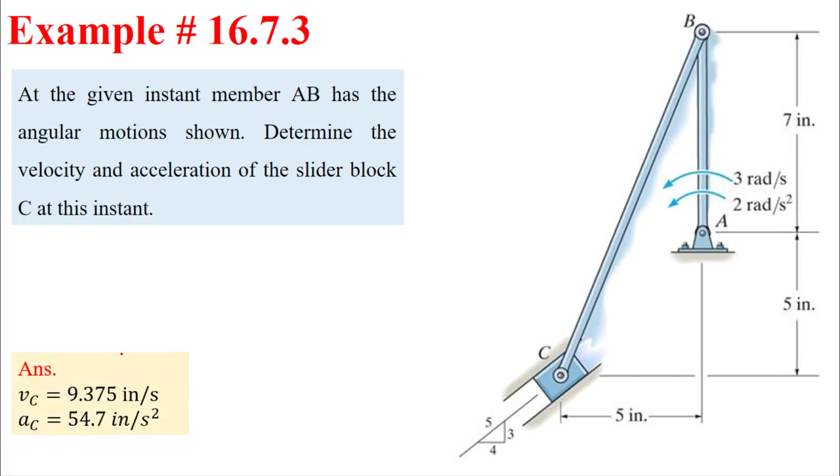كرمايندر للإشي اللي عملناه في هذا الشابتر، شابتر 16، خليني أرجع فيكم بالسكشنز لورا. هذا الشابتر كان بيحكي، وطبعا احنا لما بدينا فيه كنا مخلصين الحكي عن شابتر 12 اللي كان بيحكي عن البارتيكل. فبدينا نحكي عن الكيناماتكس للريجيد بودي.

وبهذا الشابتر بدينا بمجموعة sections 16.1 up to 16.3، وعرفنا فيها أنواع الحركة للريجيد بودي. حكينا عن translation، وحكينا عن الروتيشن، وشفنا بالترانزليشن الكيناماتكس سواء displacement أو الفيلوسيتي أو الاكسلريشن، ونفس الشي شفنا الكيناماتكس للروتيشن about fixed axis velocity والاكسلريشن.

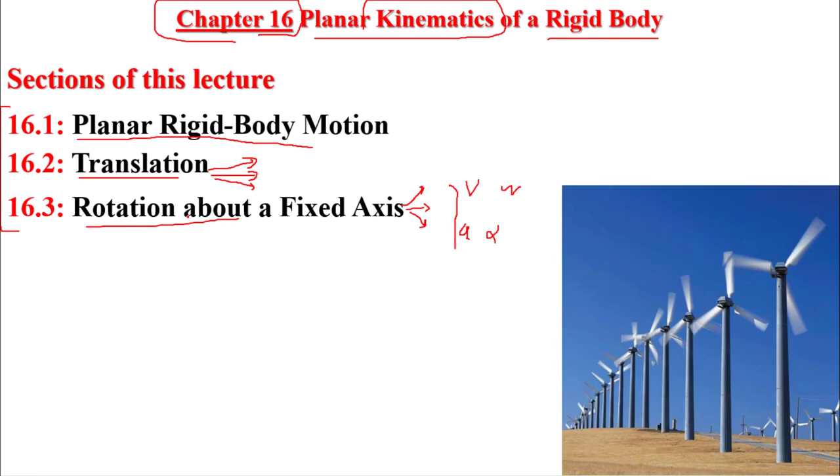وبهذا السكشن تعرفنا على العلاقة بين الفيلوسيتي والأوميجا، وبين الاكسلريشن والألفا. هذه الأشياء كلها عملناها في هذا الشابتر، وشفنا الأوبجكتيف طبعا له.

وبعدها رحنا على section 16.4، بدينا نحكي عن طرق حساب الفيلوسيتي للجنرال بلين موشن. لأننا في section 16.2 و16.3 حكينا عن أول نوعين حركة translation و rotation، وبعدها انتقلنا للجنرال بلين موشن وأوجدنا الفيلوسيتي باستعمال الابسوليوت موشن اناليسيس.

حكينا من البداية كيف نوجد علاقة بين الثيتا والديسبليسمنت، وبعدها نوجد الفيلوسيتي. هذا كان في section 16.4، طريقة حساب الفيلوسيتي للجنرال بلين موشن، وكان فيه عدة طرق. هذه أول طريقة: الابسوليوت موشن اناليسيس.

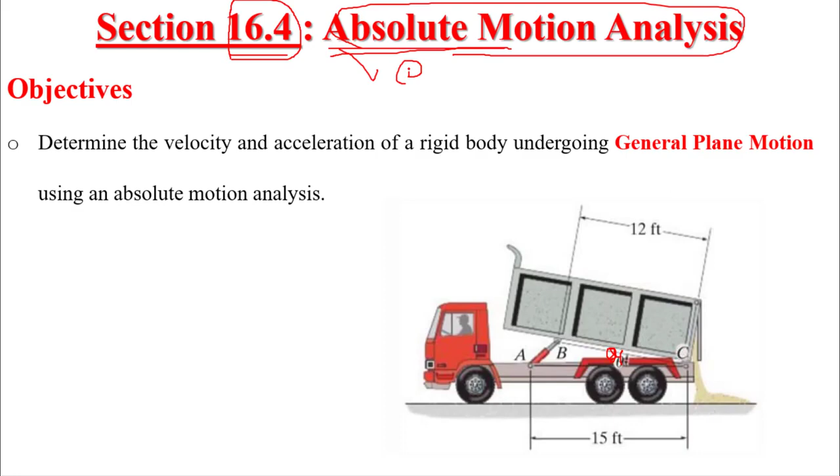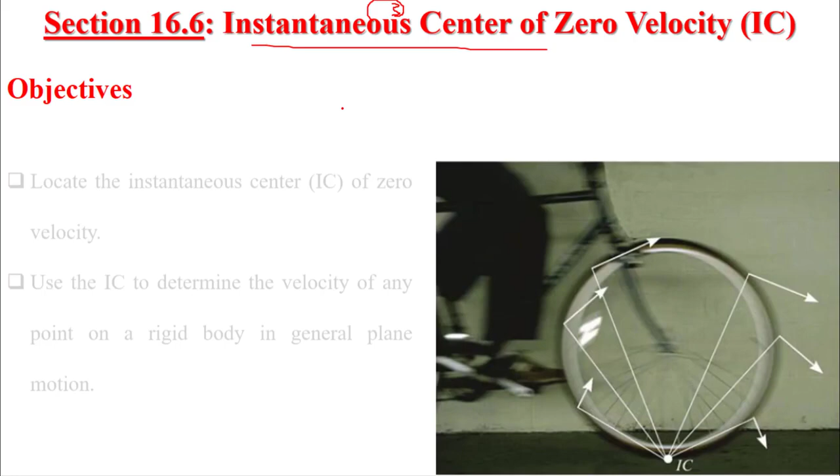الطريقة الثانية كانت الريلاتيف موشن اناليسيس لحساب الفيلوسيتي، relative motion analysis طبعا للجنرال بلين موشن again. وعندنا الطريقة الثالثة لحساب الجنرال بلين موشن velocity، وهي instantaneous center of zero velocity، IC method. وبهذه الثلاث sections أنهينا الحكي عن حساب الفيلوسيتي، وبعدين انتقلنا للسكشن اللي بعده 16.7

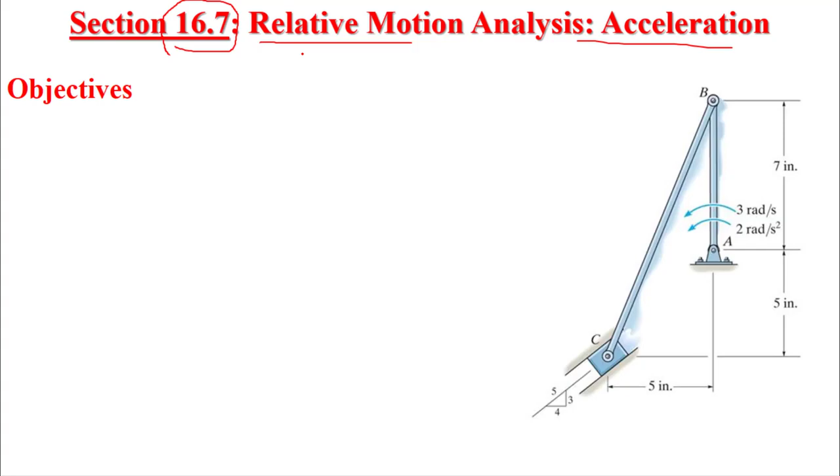وحكينا حنستعمل هذا التكنيك لحساب الاكسلريشن، relative motion analysis، نفس طريقة حساب الفيلوسيتي في سكشن 16.5. وكتبنا معادلاتها، كنا بنعرف مثلا إذا بنحكي عن اللينك BC لأنه هو اللي بيحصل عليه جنرال بلين موشن. إذا كنا بنحكي عن سرعة BC، relative velocity equation: VB plus omega cross product RB with respect to C أو RC with respect to B.

سمينا هذا الترم اللي هو relative velocity VC with respect to B. وجينا اشتقينا هذه المعادلة في هذا السكشن، وطلعت معنا معادلة الاكسلريشن اللي هي AC بتساوي AB، absolute acceleration سميناها، وحكينا this is equal or plus alpha cross product relative position vector RC with respect to B، minus omega squared RC with respect to B.

وسمينا هذه، both of them، اسمهم AB with respect، AC with respect to B. This one called tangential, AC with respect to B tangential، وهذا AC with respect to B normal. So هذه كانت في section 16.7.

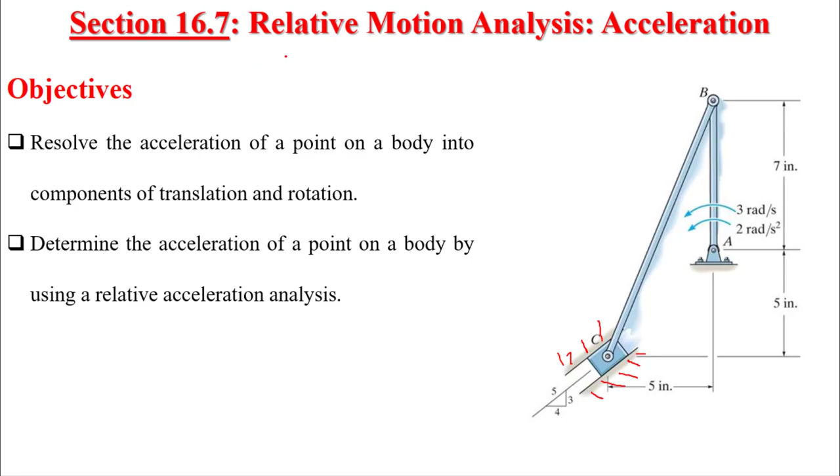وكمان بدي تلاحظوا إنه كان دائما إذا كان عندي سلايدر، كان دائما connected with the ground. So from one side connected with one of the link and from the other side connected with the ground. أغلب الأسئلة لو ترجعوا 16.7 هتلاقوها بهذه الطريقة.

طيب so section 16.8 هسه بنحكي عن relative motion analysis، نفس العنوان، relative motion analysis للأكسلريشن، ولكن هون حنستعمل الروتيتنج axis. في كل البروبلم السابقة كان الأكسس يحصل له translation only without rotation. هون حيحصل له الأكسس two things: translating and rotating at the same time.

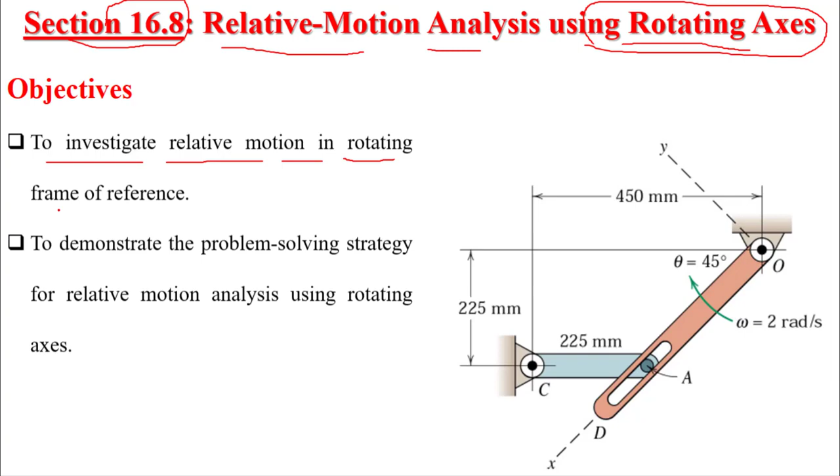So the objective is to investigate the relative motion in rotating frame of reference. هنشوف الموشن لما يكون الريفرنس بيحصل له rotating، لما يكون الفريم of reference بيحصل له rotating، to demonstrate the problem solving strategy for relative motion analysis using rotating axis.

طيب so إذا بنيجي بنطلع very quickly على هذا النوع من الأسئلة، وباجي بسألكم سؤال من هذه النوعية من الأسئلة: مين فيهم بيطبق على 16.7 ومين فيهم بيطبق على 16.8، عشان تعرفوا تجاوبوا.

خلينا أفرجيكم هذه. طبعا هذا السؤال زي هيك يطبق على 16.8. ليش مباشرة حكمت؟ لأنه السلايدر، زي ما انتم شايفين، which is fixed and rotate with link AC. So this slider rigidly connected on AC and it freely rotate with the link OD as you can see.

So this slider has two motions actually. The first motion is a translation with the link AC. Okay, so here is the track.

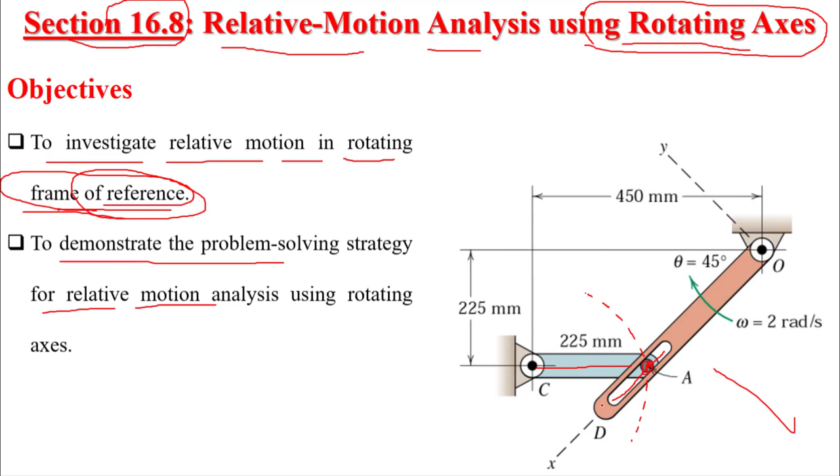Okay, and at the same time it slides on link OA. So it has two motions. So if we take a look to these examples,

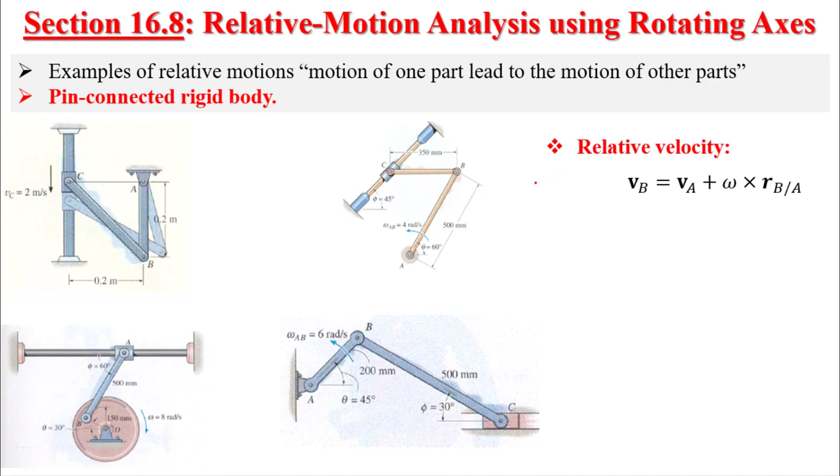So if the slider does only one type of motion, then we can say that we can solve it by using the previous knowledge from section 16.5 and from section 16.7. These questions are considered from section 16.7, only translating.

Okay, now if we have a problem like this, I'll ask you which of these examples is applicable for 16.7 and which of them is applicable to section 16.8. Take like one minute, pause the video and try to think and determine which of these examples is applicable for section 16.7.

If your answer was that all of them are applicable for section 16.8, then your answer is correct. So all of these examples are only applicable for section 16.8. But why can't you benefit from section 16.7 only? You must use section 16.8.

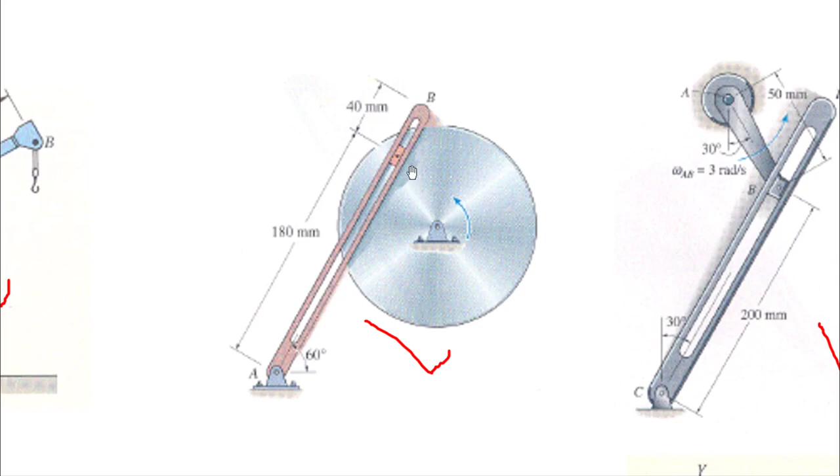Why? Because, for example, if I start with this scenario, here is the slider, and the slider here is rigidly connected to the disk, so it rotates. The first type of motion is rotation with the disk, and it's freely sliding inside this channel on link AB, which is doing rotation. So it is sliding on link AB, freely sliding, translating from one point to another, and freely rotating, rigidly connected on the disk, so it rotates with the disk. Here the same.

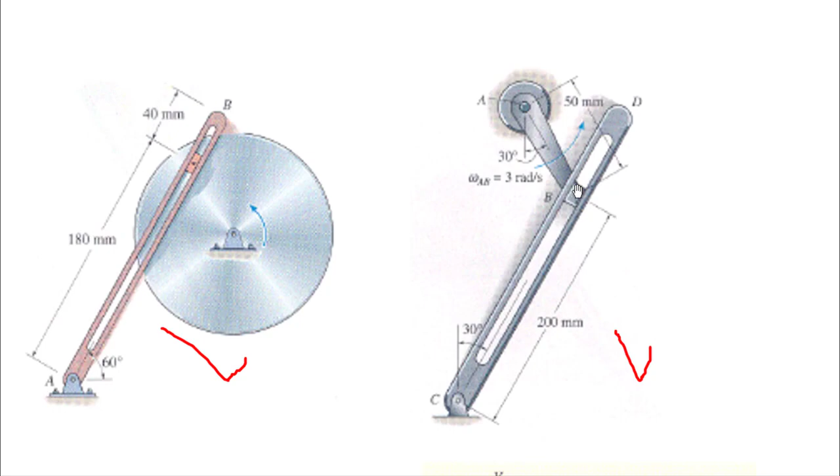So the slider is sliding with link CD and rotating with link AB. So for this one, for example, where is the link that is doing general plane motion? Where is it? This link AB. So here in the middle we have this slider.

So from this point onward, it will extend or contract. So this link AB can rotate, and at the same time it can extend. So here the slider will have two types of motion, rotation and at the same time translating.

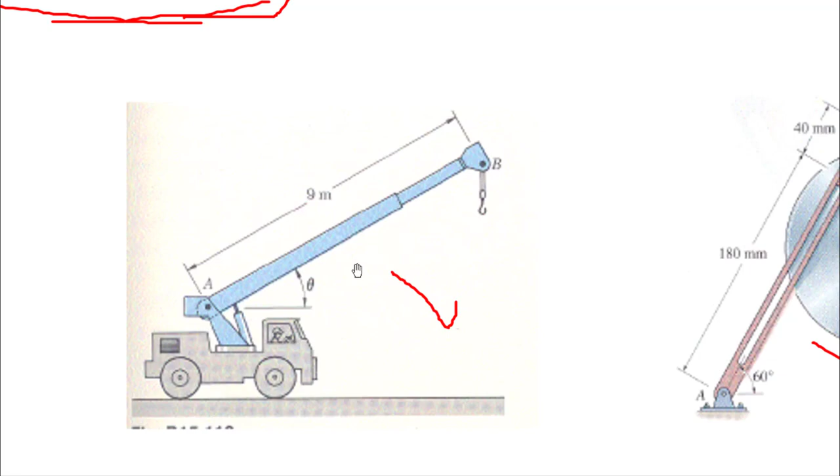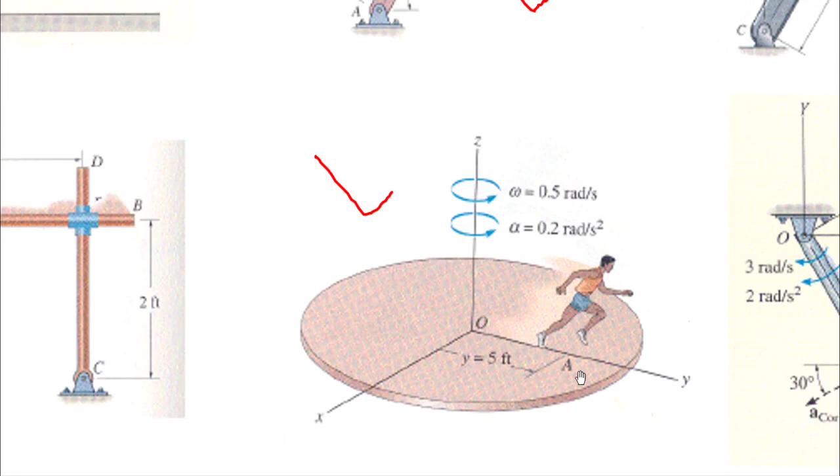So let's see another example. This runner, for example, here this disk is rotating. So this runner will rotate with this disk, and at the same time he is starting from the centroid and running toward the circumference. So he is translating, and at the same time he is rotating with this disk.

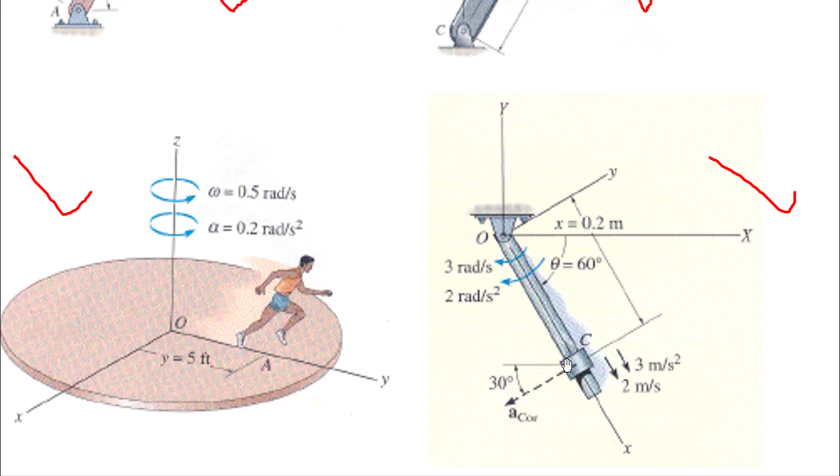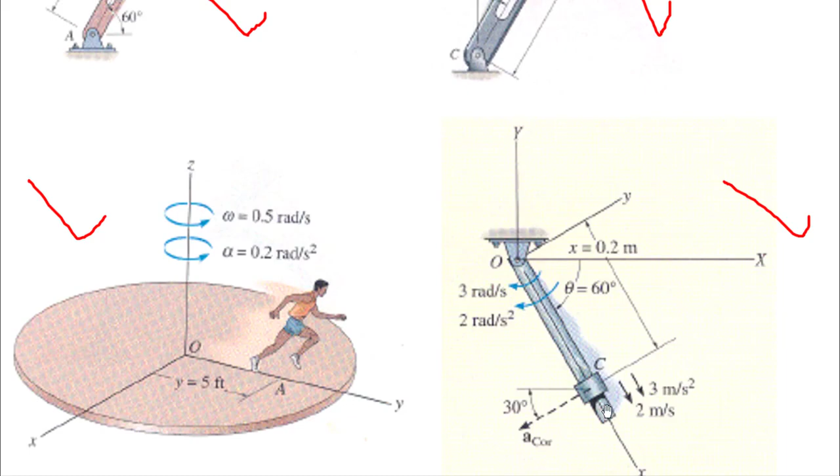This collar or ring has two types of motion: translating, sliding on this link, and rotating with this link, because this link is rotating also. So it is sliding forward or backward, and it is rotating at the same time. So two types of motion.

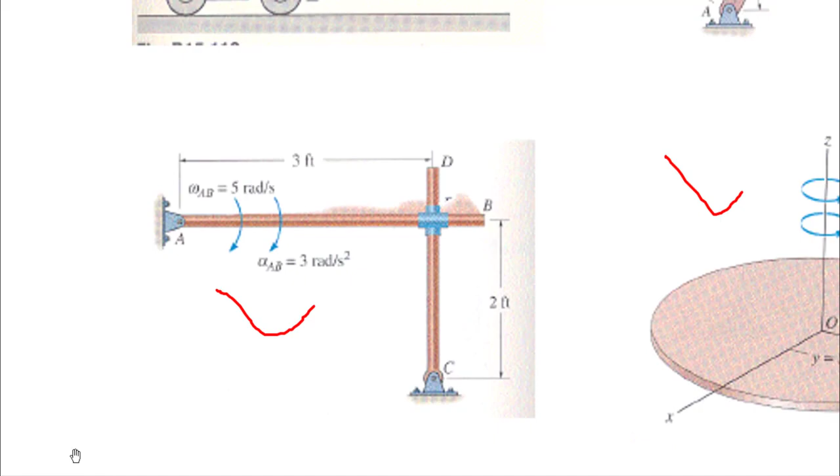This connection has two types of motion because it can slide as these two links rotate. So it rotates and slides at the same time.

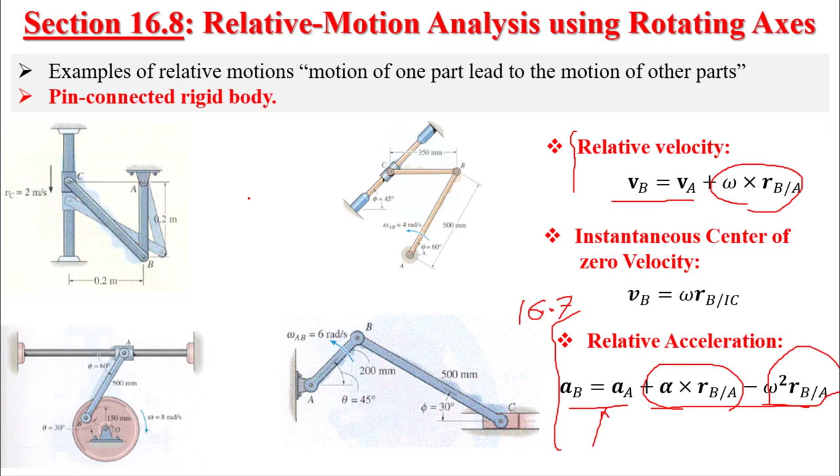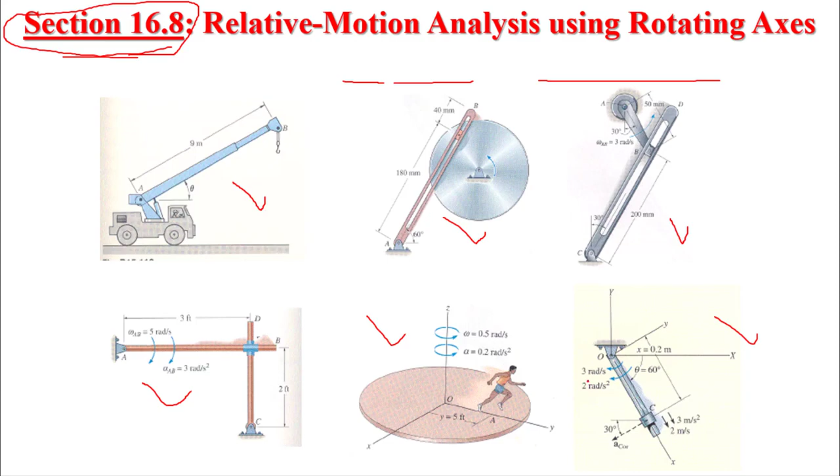So this example of relative motion with sliding connections has two independent motions, rotating and translating. In the previous examples, the slider would do only one type of motion, sliding only, because it's connected to the ground. In this type of example, it's not connected to the ground, it's between two links. In this scenario, it is not connected to the ground, it is sliding on a rotating link, so it slides and rotates on a rotating link. So two types of motion, two independent motions.

So take a look at this rigid body in blue color. Let us first try to notice the most important things written on this figure. So here we have a point, an observation point, we can call it, for one sitting on this point and observing this rigid body. So we'll take it as a reference. This reference, its name is X and Y uppercase.

Now, this rigid body, I can relate point A and point B with respect to this point, but you can see that this rigid body is translating from this point to there, and at the same time it rotates. So this rigid body translates and rotates. So you can notice that this frame, this coordinate system, is rotating. So it is not correct to say that point A has this coordinate system.

This coordinate system actually rotates with a certain angle. So here is the rotation, new location. So the axis is rotating. Is this going to affect the value of the relative velocity, for example, if we start with the velocity, or does it affect the position equation? We'll see, okay.

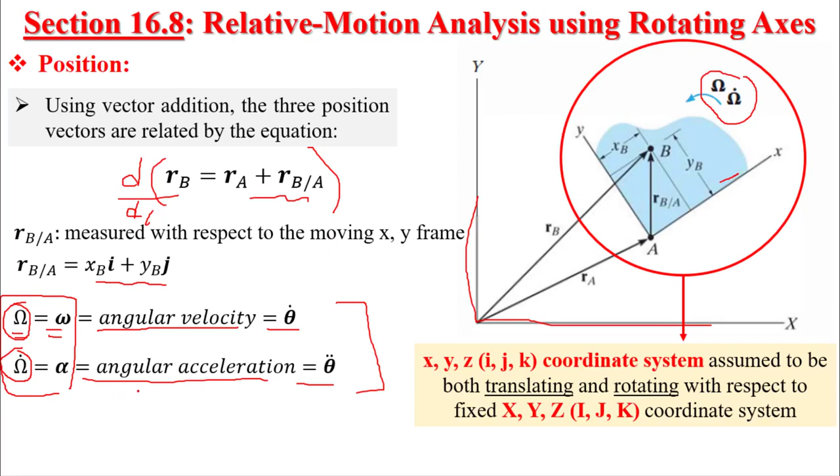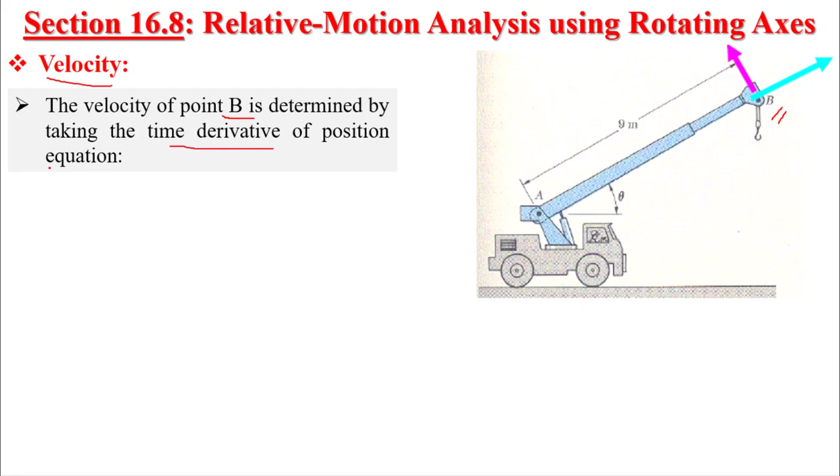So, how can we find velocity for a slider that is translating and rotating? The velocity of point B is determined by taking the time derivative of the position equation: RB equals RA plus RB with respect to A. So if I take the time derivative, the absolute position becomes absolute velocity - nothing's changed, it's the same.

dRA with respect to dt is equal to VA, absolute velocities, nothing changed. The only change will happen in this parameter, d with respect to dt. As you remember, RB with respect to A is equal to

XB, lowercase, multiplied by its direction, plus YB multiplied by J. So here we have two variables. Now we'll derive them with respect to time. So this relative position: rotate and translate. Translate x and y will change; they will be variable. Rotate axis I and j will also become variables.

So if I insert the derivation to this relative position vector, xbi plus ybj, the derivative will go to the first variable, then it will go to the other one, plus. So here we have two variables: first derivative multiplied by the second, plus first parameter multiplied by the derivative of the second one. Plus the same thing will happen for the other parameter: derivative of the first multiplied by second plus the first multiplied by the derivative of the second.

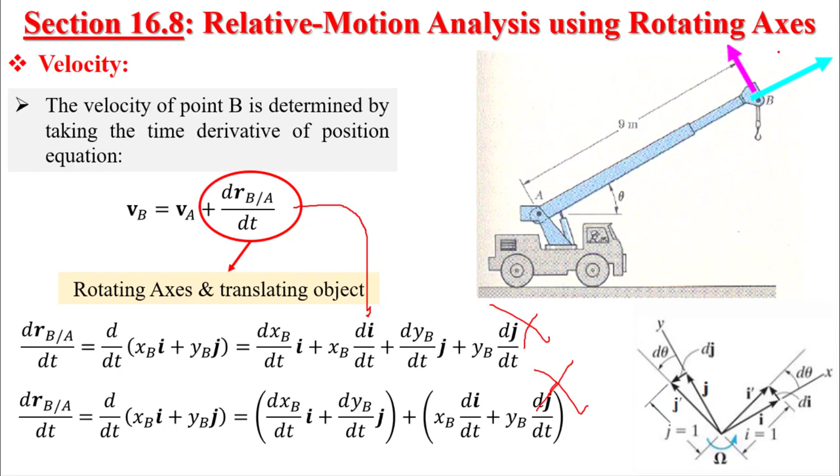equation to the velocity relative position equation. We reach up to this format. We write VB equal VA plus this term. Still we derive this term. We reach up to this one. So we gather these two terms together and these two terms together.

So these two terms represent the velocity of point B with respect to the x, y, z coordinate system. This is the relative velocity of B with respect to the x, y, z system. And this term represents the rotation d theta of the x, y, z axis. So this term can be written as VB with respect to A for the x, y, z coordinate system, and this term can be written as omega cross product xb in I direction plus yb in j direction.

So how do we transfer from here to there? From the knowledge of this picture, as I told you before, this is the arc, di, and this is theta. So I can substitute in here, or I can take it outside, and you know that omega and xb, both of them, so I can transform it to the cross product.

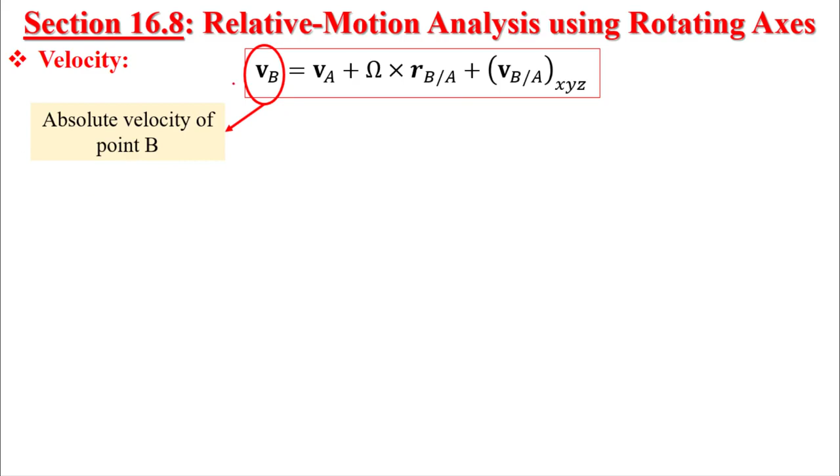So what we can understand from this equation, the first term is the absolute velocity of B. The two terms here is the absolute velocity of B on the XYZ frame. This is very similar to the original equation without the last term. This last term is the relative velocity of B with respect to A, so it is a relation between the secondary coordinate system and the original coordinate system.

And here is the explanation for each term. Now this is the velocity equation for a rigid body that does two types of motion, translating and rotating.

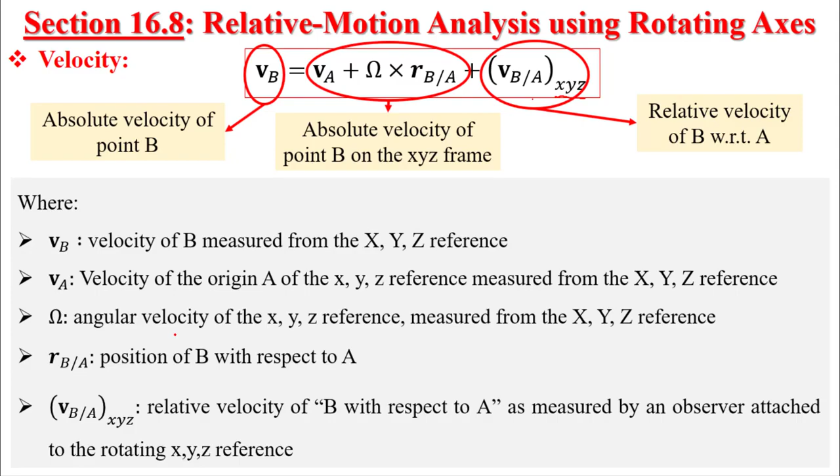Acceleration, what we'll do, we'll take the time derivative for this equation. So the time derivative for the first term can be written in this format. The second one, dV over dt. The third term, we have two variables, so the first derivative of the first cross product the second, plus first cross product the derivative of the second, plus the time derivative of the relative velocity.

Here the first three terms, this one and this one and this one, is straightforward, because instead of this one I can write AB directly. Acceleration, absolute acceleration of point A, of point B. Here, absolute acceleration of point A. This one, the omega with respect to dt is omega dot, or alpha. So it is direct.

This one, omega cross product dRB with respect to dt, will go through same steps as in the previous slide. So I can write the direct answer for this one, which is, remember, we named this term as dR with respect to dt for whom? For RB with respect to A. So I can write the final result, so instead of this term I'll remove it and write this one.

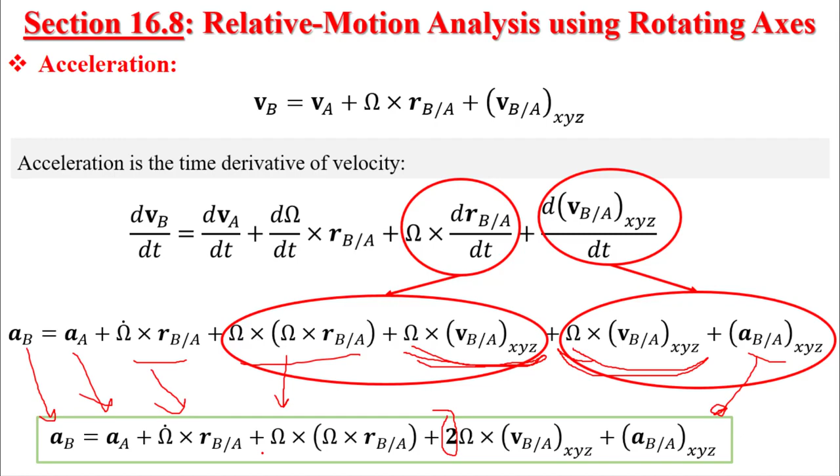Now, how can we compare this equation with the previous equation in section 16.7? Here it is. You can tell that this equation up to here represents 16.7, because this represents alpha cross product RB with respect to A. Here the cross product gives us, I showed to you earlier, this one, which is equal to minus omega squared RB with respect to A, and I explained before why it becomes minus. So instead of omega squared, I can write this symbol.

The only new terms are these two in the acceleration equation when we have a body that does both types of motion. This is the absolute acceleration of the origin. This is the tangential acceleration, alpha cross product r, and this is the normal acceleration, omega squared r, with a minus sign of course.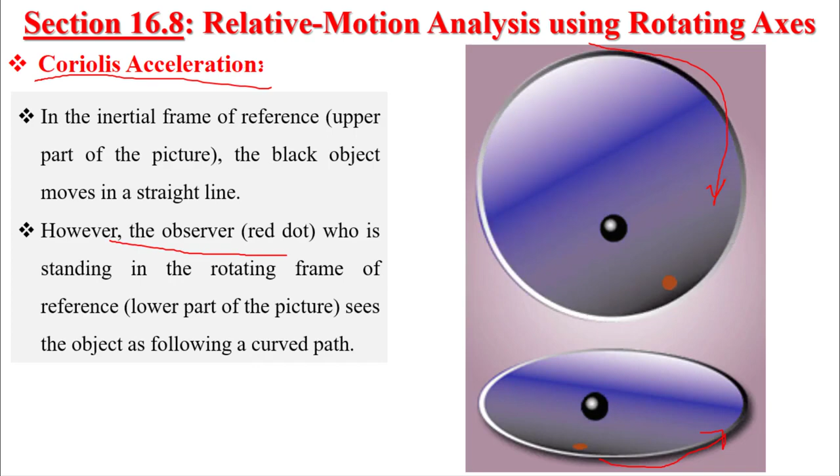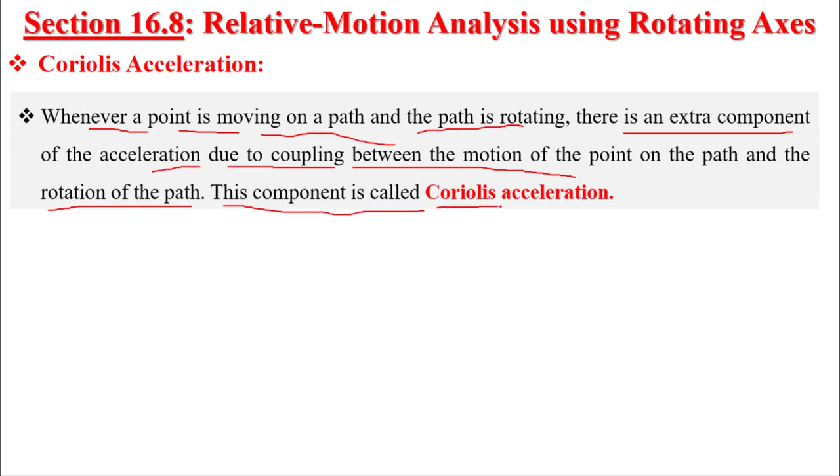That means the Coriolis acceleration is responsible for the two types of motion, translating and rotating. So Coriolis acceleration: whenever a point is moving on a path and the path is rotating, there is an extra component of acceleration due to the coupling between the motion of the point on the path and the rotation of the path. This component is called Coriolis acceleration.

It is the coupling between rotation and translating. It was discovered by the French engineer Coriolis, and it's named after him.

Important: this component of acceleration is very important in studying the effect of force and acceleration of Earth's rotation on rockets and long-range projectiles.

Because here we are facing two types of motion: the rocket translates, and at the same time the Earth rotates. So we have a coupling, and we need to consider the relative coupling between them—because the Earth is doing rotation and there is gravity acceleration affecting the rocket, so it will rotate with the Earth, and at the same time it will translate far away from the Earth.

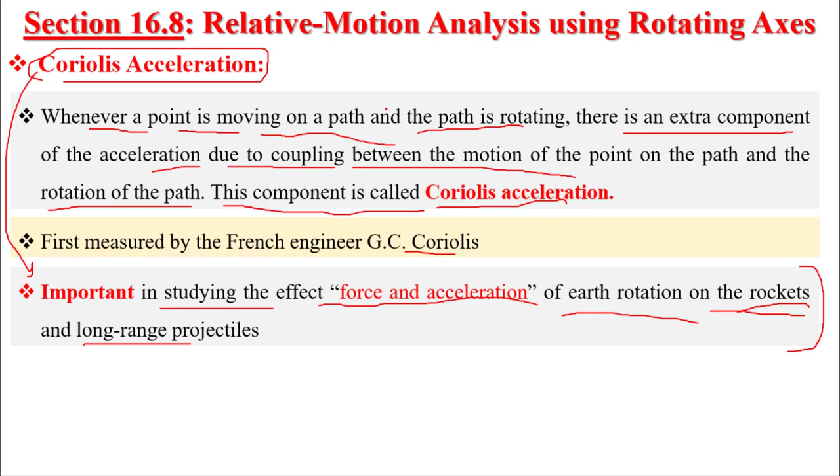And of course, if we are asking you to use section 16.8, we will provide you with the equation. If you go back to the data sheet, you can notice those equations are given there. By the way, you can delete the last two terms if we have normal relative acceleration, as we saw earlier in section 16.7. The same goes for relative velocity—you can delete the last term if you don't have the Coriolis effect, just like in the previous sections.

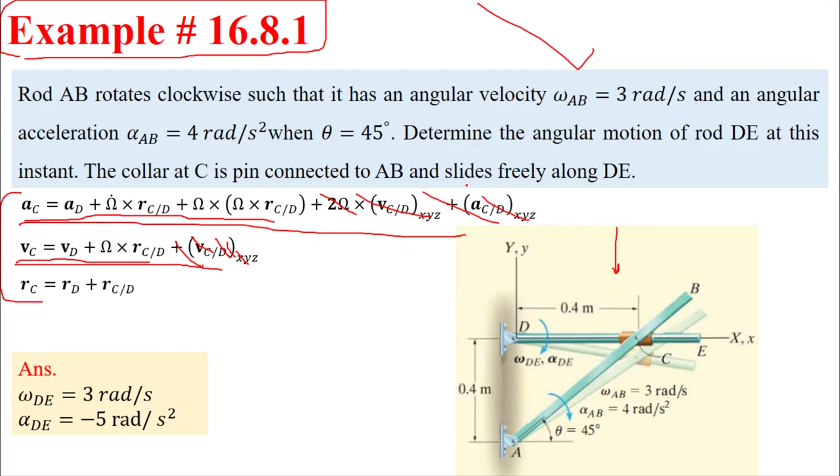So next time I'll start with this simple example. It will be a long one, but it's a simple scenario, and we'll end up with this example, which will be the most difficult scenario. Okay, so until then, stay safe.